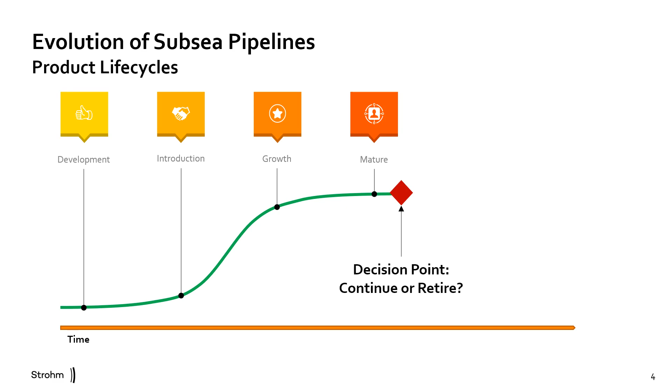And then there is a dilemma. Every product life cycle has an inevitable milestone where a decision has to be made to either continue with that product or retire it. If we continue, there are options. We can allow it to naturally decline, or we can innovate, seeking incremental improvements that will keep us moving onwards and upwards, prolonging or extending the lifetime of our product.

Our industry is full of great examples of innovative product iterations, but a disruptive innovation is one that provides a real step change in productivity, and these are rare.

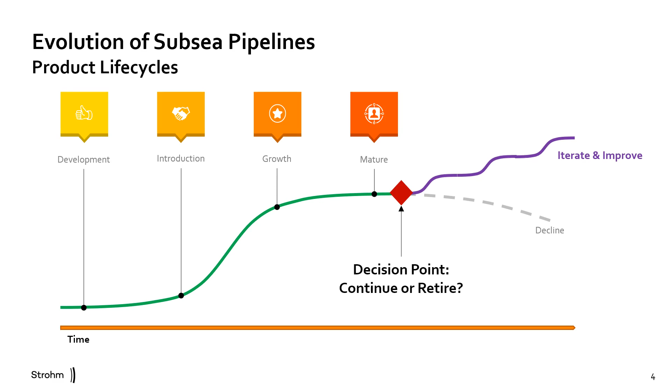To illustrate, let's take this idea of a disruptive innovation and apply it a little closer to home. So consider the subsea pipeline industry.

When we look at traditional subsea pipelines, there is a long and successful track record, beginning with rigid steel pipe. For many years, this was the product of choice for oil and gas transportation, and definitely the most prolific pipeline product used in our industry today.

Our first major example of disruptive innovation was the unbonded flexible pipe. Pioneered over 50 years ago by Technip, this product built on the robustness of the metals technology already used in steel pipelines, and introduced polymers as non-structural layers in order to provide a conduit for the transported fluids.

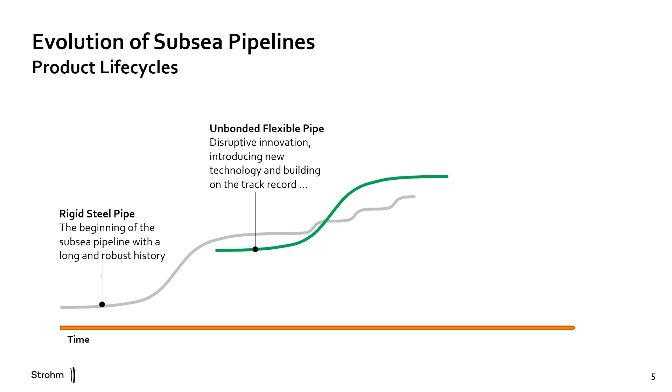This decoupling brought many advantages, making the pipelines flexible, led to easier and quicker installation. Creating a polymer conduit to contain the bore fluids allowed us to select materials that could better withstand the extreme fluids that the pipeline had to transport.

In its 50-year history, the unbonded flexible pipe has seen continuous innovation and improvement. There are many options in terms of material. For the metal components, you can choose from low-cost standard steels all the way up to highly specialized exotic alloys.

The polymers used in unbonded flexible pipe have also seen continuous development. Materials used for the fluid barrier have been refined to the point that we now have options based on polyethylene, nylon, and of course PVDF that have been specifically formulated for use in our industry, giving the best balance between robustness and chemical compatibility, ensuring a long and safe service life.

Much like the introduction of flexibles built on the development of the metals used in rigid pipelines, Thermoplastic Composite Pipe, or TCP, takes the experience we have with the robust and qualified high-performing oil-field polymers and opens up a new world of possibility.

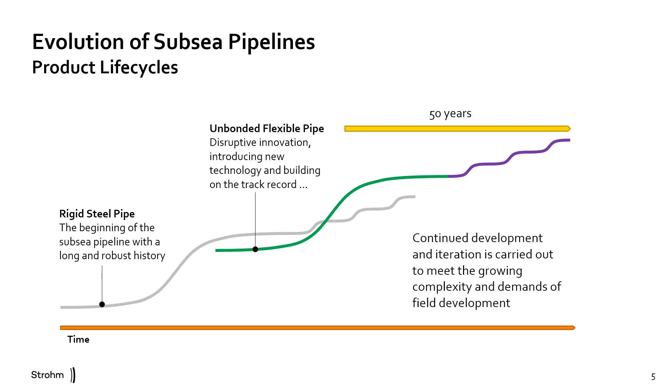The introduction of TCP represents a step change in the subsea pipeline industry, and Strohm bring an approach to its development which has its roots in the most innovative companies of today. The starting point for TCP was to create a platform that took full advantage of the highly refined thermoplastic polymer systems used in unbonded flexibles.

Combined with the expertise, design tools, materials technology, as well as the mindset used in the aircraft and space industries, this platform gives us endless possibilities to refine and optimize the capability of subsea pipelines, and allows us to move forwards on a trajectory that not only meets the needs of today, but has the capability to meet the needs of the future.

These are not just words. The evidence speaks for itself.

A little less than 10 years ago, and only a handful of years since the concept of using TCP for subsea pipelines was created, we successfully introduced our first commercial product line for subsea well intervention.

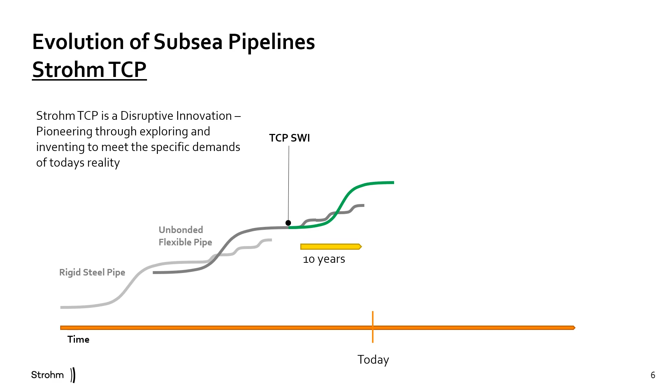As it is the nature of TCP platform to evolve, and in partnership with the early adopters amongst our client base, we quickly built on this success and moved into the development and introduction of jumpers and flow lines.

Whilst this was going on, we also led the way in the creation of a new DNV-authored industry standard that would govern the design, qualification, and use of TCP.

In the last 5 years, we have sold and installed many subsea jumpers and flow lines, all qualified to this robust industry standard. Today, we are in a period of exponential growth set to continue for the foreseeable future.

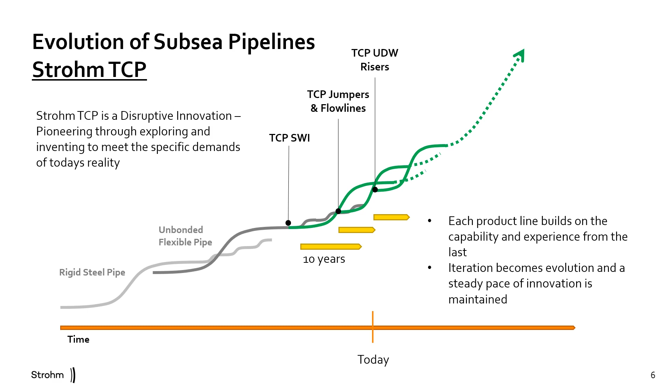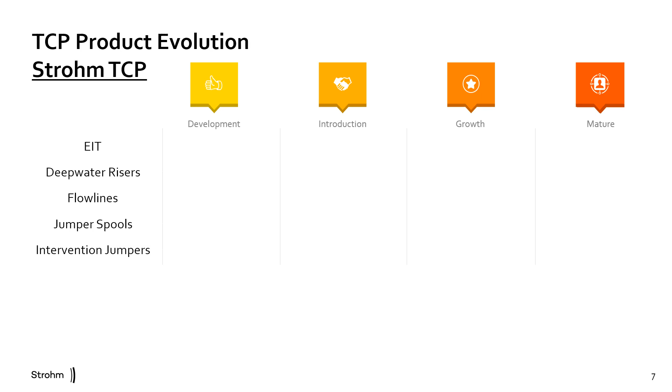Strohm is already an established supplier of TCP in the subsea pipeline industry. We are extremely proud of our track record and have several successful product lines covering subsea well intervention, jumpers, and flow lines. Looking to the future, we are already on the cusp of introducing the next generation of TCP.

After recent advances in the capability of our materials, design, and manufacturing technology, deepwater risers are the next major product line that is ready for introduction.

We are also expanding our business, meeting our clients' needs in the energy transition space with safe and efficient hydrogen transport, as well as pipelines for carbon capture.

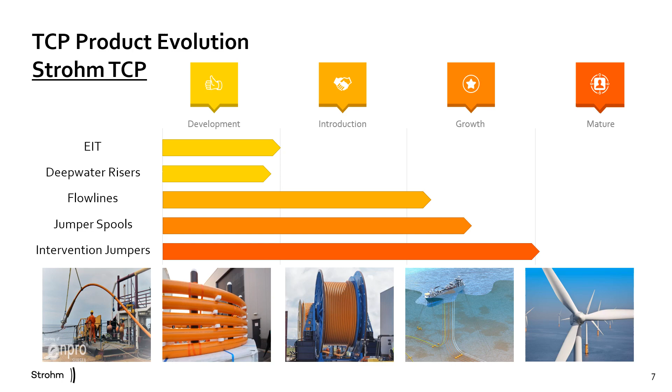So what is TCP? Well, it's really very simple. We have a multi-layer construction, not unlike traditional technology, except that it's a fully bonded structure based on a single thermoplastic material family that has been selected to provide the best performance for the target application.

To be more specific, we have taken the specialized thermoplastic polymers developed as a fluid barrier in unbonded flexible pipes and given them the job of also maintaining the structural integrity.

We do this by adding either glass or carbon fibers in such a way that we add strength to the material in precisely the location and direction where it's needed.

And all of this is carried out in a single production facility, employing our proprietary manufacturing technology that melt fuses all of the layers to form one continuous reinforced cross-section to an exceptionally high level of quality.

There are infinite possibilities to create tailor-made structures in this way, but in TCP we focus on a combination of several key aspects, namely the internal pressure requirement, the external pressure requirement, as well as the overall tensile properties required for installation and operation.

The result is a pipe body structure that is lightweight, flexible, and completely corrosion-free throughout its lifetime. We even have a built-in solution for adding weight, often to aid on-bottom stability, or in the case of a riser, stability in the water column.

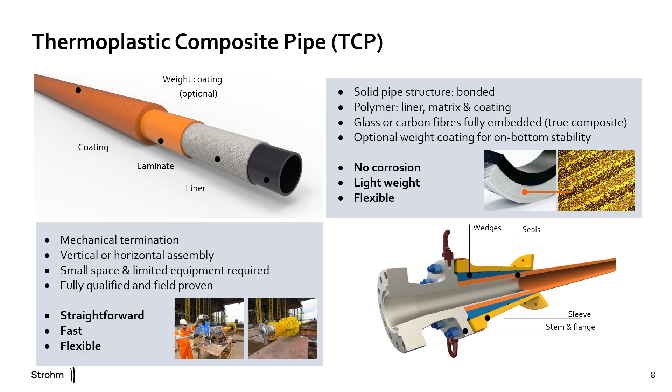The core of the product is based on proven and qualified oilfield thermoplastic polymers. To date, we have 3 options depending on your application. Our primary product line, and the source of our excellent track record, is our polyethylene pipe, which uses glass fibers for reinforcement. Fully qualified in accordance with DNV standard F119, it boasts a top-end operating temperature of up to 65°C, and a maximum pressure, based on what we have supplied to date, of around 5,000 psi. With all the benefits of polyethylene for mid-level applications, this is the workhorse of the TCP product line.

For more specialized or onerous applications, we have 2 material options utilizing carbon fibers for reinforcement. These are intended for high pressure and deep water, but also extend our operating temperature window up to 80°C for nylon and 120°C for PVDF. While the carbon fiber provides exceptional structural properties, these materials have been specifically developed to cope with extreme conditions such as high CO2 content and sour service.

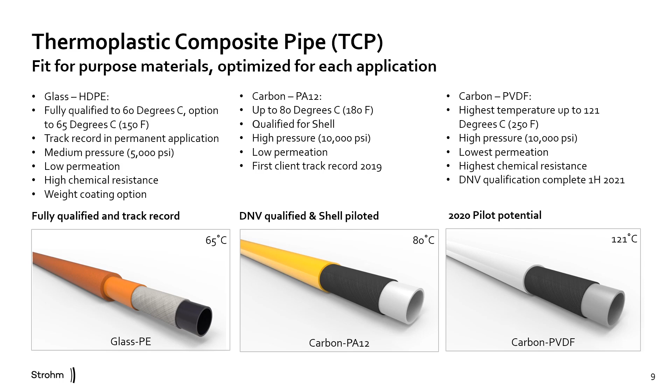All of our TCP products boast extremely low gas permeability due to the bonded cross-section and the additional shielding provided by the inclusion of fibers, which take up approximately 50% of the volume in the composite section.

Strohm don't just offer outstanding pipe. We bring you many benefits and provide value that makes TCP an outstanding solution. In the following slides, I will dive a little deeper into each aspect of the supply chain and give you real examples of where TCP can and will be your product of choice. Let's start with the engineering and manufacture.

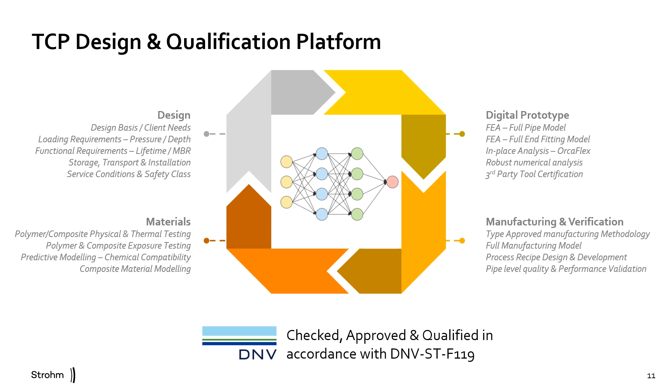The polymer is the base level constituent, and we have carried out tens of thousands of tests on polymer coupons. Some tests are used to purely characterize the material and ensure that it meets our expectations, but the majority are to validate what we already have predicted using our analytical tools and models. Consider properties such as chemical aging and resistance to rapid gas decompression. Understanding these things and having the ability to accurately predict their effects are key to the safety of our product, so we feel it is essential that we pay close attention at the very beginning in order to account for them in the design later on.

This approach continues upwards. When we combine the polymer and fiber into a composite tape, or when we add multiple tapes to make a laminate, we fully simulate and then rigorously validate the performance. We use engineering know-how and science to create accurate models that are then used as the inputs to our structural design tools. Because we build products that need to last many years in such extreme environments, we don't just look at the virgin material.

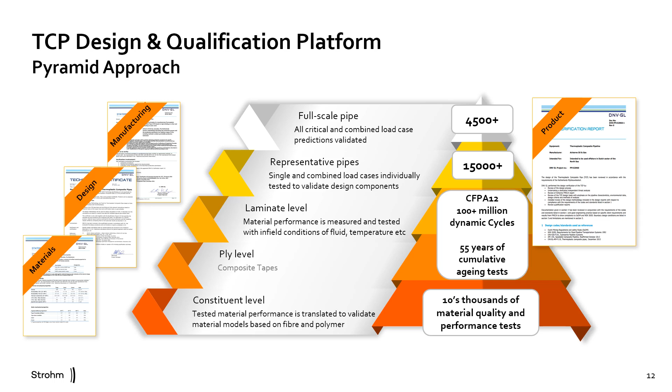The pyramid gives you an idea of the extent of our understanding and the rigorous approach we have to design a TCP. But what about your specific application?

The first step in evaluating any application is the service fluid assessment. This assessment gives us some very clear answers to which of our materials is suitable for your application. Based on the combined knowledge of our subject matter experts, and of course the huge amount of data we obtain during qualification, we can quickly identify a solution that is fit for purpose.

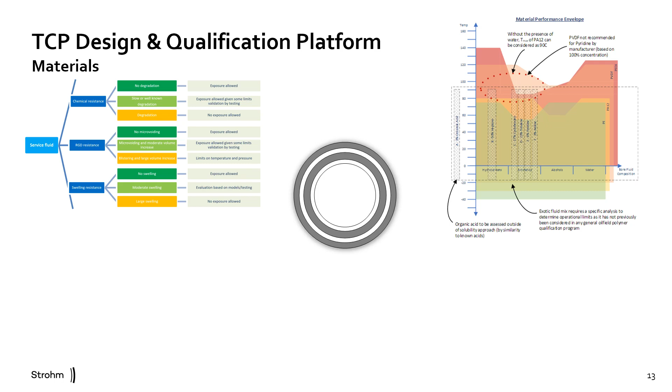We focus on your operational requirements and then further refine the assessment into areas such as chemical compatibility, resistance to rapid gas decompression and swelling. We then consider the long-term utilization of our materials, and safety is built in with the DNV standard F119.

We first fit the test data to curves and then calculate the regression. At this point we need to make sure that all points, including outliers, are taken into account and apply what is known as the lower confidence limit.

Also, from here we apply a safety factor based on the type of service, and only then produce a curve that we can use for design. This safety factor is significant and is intended to ensure beyond any doubt that when a TCP is in service, you can fully rely on its performance and integrity for the full service life.

The data population is also important. The benefit of generating high levels of data, not just during qualification, but data that is representative of the continuous material supply that we receive, is that we can add an additional element of safety by ensuring that at all times the performance we consider for our design is well within the limits set in our specifications. If any specific batch does not meet the requirement, then it is not used in your pipe.

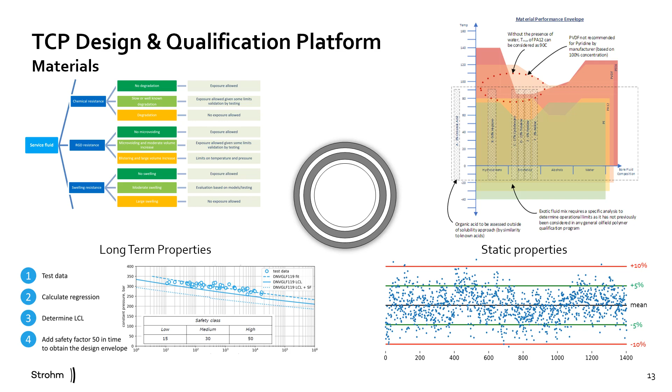It is a similar story when we look at the pipe design itself. Safety and robustness are key to our success. So in addition to the safety built into our materials, we continue the theme into the design.

Consider the chart shown. When we design a pipe, we also create a digital prototype. That prototype is then digitally tested, and the output is the predicted performance that we need to validate through physical testing. Of course, what happens in real life does not always match what happens on the screen, so we retest

digitally, taking into account the upper and lower tolerances from every step of our pipe manufacturing and end fitting process. This gives us two curves that represent the best case geometry as well as the worst case geometry. These are translated into an upper acceptance limit on performance and also a lower acceptance limit.

The real expected performance, given that manufacturing tolerances can never be fully eliminated, is generally in the middle of these two curves. A pipe with as-built performance anywhere between these two curves is considered acceptable for qualification. However, to maintain our mindset of safety and robustness, the safety factor and resulting design space is always calculated from the lower acceptance limit, ensuring the pipe always has a very high minimum safety factor, regardless of whether it's at the low end or high end of the acceptance limit.

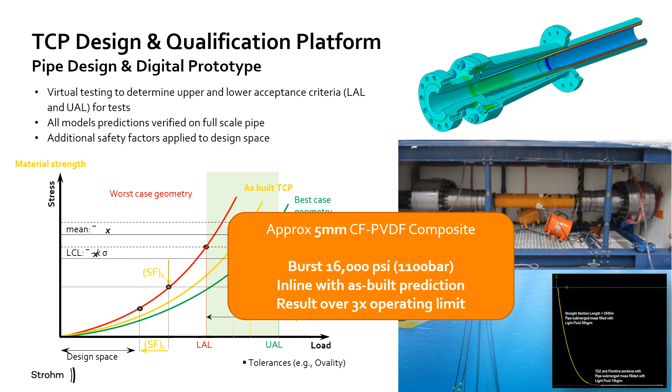Let's move on to manufacturing. Located in the port of Amsterdam, we have our state-of-the-art production facility. Alongside our in-house extrusion capabilities, we have 3 TCP production lines—2 for commercial work, and 1 development line. We have 2 sets of carousels, and then a whole range of storage reels. The entire facility is clean, compact, and above all efficient, with all of our engineering, test, and production teams co-located. It's also very easy to visit us, with just a short drive to Schiphol Airport.

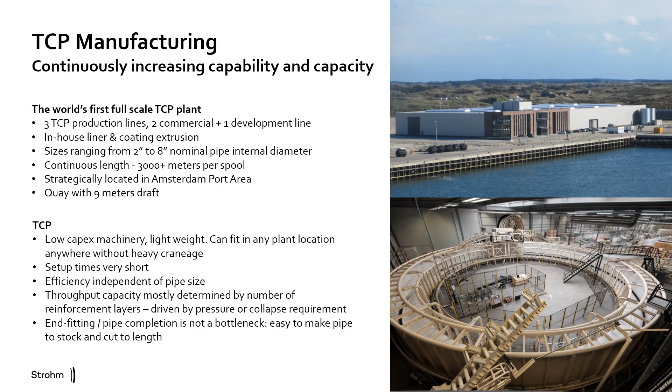In each of our production lines, we have a series of tape winders, and then what we call melt fusion stations, or MFS. The polymer liner is made on our extrusion line and sent to a carousel for storage. When needed, it's fed through to our tape winders, where the composite tape is wound at a specific angle to give the desired properties. At this point, we're not too concerned about micron-perfect tape placement, as the system is fully capable of dealing with gaps and overlaps within the individual tape layers. The key is the angle.

From here, the tape is fed into our MFS, where our proprietary system applies just the right amount of temperature and pressure to create a fully consolidated layer. This process is repeated over and over until we reach the desired laminate thickness to give the pipe the performance it needs. We also have the freedom to change the angle within any individual layer to tailor the pipe cross-section properties for specific applications such as riser systems. Regardless of this change, the process remains exactly the same, and we arrive at a fully bonded cross-section tailored to your need.

But what about the quality? Consider zero porosity, defects, and voids as 100% on a quality scale. In general, a composite structure is as near to perfect as it gets when it's at 97% or above, and actually this is the number used for the structures of the aircraft that we all like to fly in.

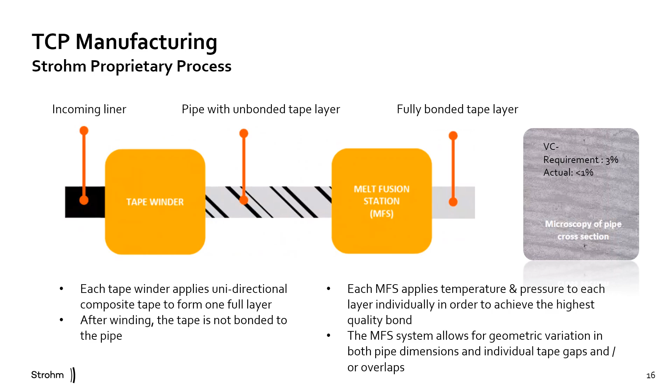In addition to this, we also have 100% visual inspection during manufacture, and at the end of every pipe, dozens of samples are taken and inspected under a microscope. For the unlikely event where something does make it through, we also have a certified repair procedure that we can carry out online. We simply pause production, address the affected area, and then carry on.

As mentioned earlier, the key advantage of a composite structure is that by placing the fibers in the right direction at the right location, we have an incredibly fine level of control and can tailor its performance to any application. What this means is that for any tape layer throughout the composite laminate section, we dictate the specific angle at which we lay the tape.

In its simplest form, we split this into two main categories, which we call our flowline layup and our riser layup. Generally, the flowline layup is for static or quasi-static applications that do not require enhanced tensile performance. In these designs, the tape angle gives us a balance between internal pressure resistance, external pressure resistance, and the tensile capacity of the pipe. As this name suggests, this is an ideal layup for flow lines and is also used for jumpers.

For risers, or any pipe that requires high tensile capacity, we do things a little differently. Within the composite structure, we vary the tape lay angle significantly. This allows us to maintain the balance between internal and external pressure capacity, while adding more fibers in the axial direction to achieve tensile capacity. As with any balance, if you offset one aspect, there's a trade-off. In the case of adding more fibers in the axial direction, we increase the pipe stiffness, and this can lead to a larger minimum bending radius.

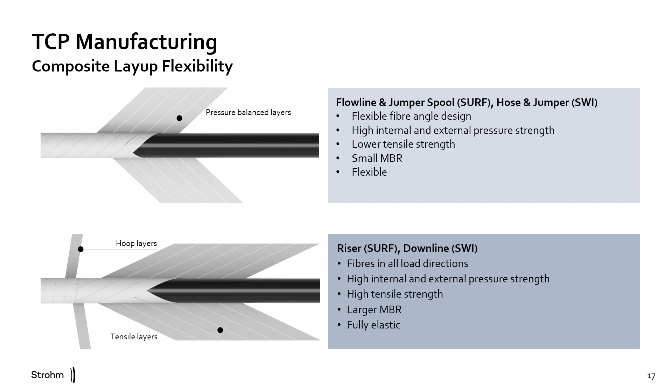Here is an example of a carbon fiber PVDF pipe at various points in our manufacturing process. We currently have several material options for the various layers, and from a supply chain continuity perspective, this is important. But we also have materials tailored to the two main categories mentioned.

In terms of qualification status, we have finished the majority of testing and validation for the polymer and tape materials in the flow line and jumper category. These qualification projects will be fully complete by the middle of this year. In terms of pipe level qualification and validation, we are currently in the middle of a project that will qualify the first carbon fiber PVDF TCP for high temperature and high pressure deep water jumper and flow line operations.

For the riser system, we have several more options in terms of material. On the previous slide, I mentioned that using the riser layup leads to increased stiffness of the pipe and may lead to an increased MBR. This is not a problem because again it's all about balance.

To counteract the trade-off between tensile strength and stiffness, and in partnership with our key material supplier, we have developed a higher performance tape option which gives us increased strength exactly where it's needed to reduce the MBR. The qualification for this material is already underway, and we have plans for the full riser system qualification in the very near future.

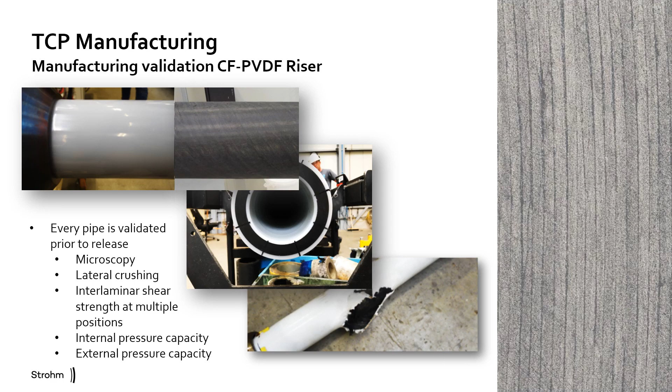The question is often still asked, what about the parts of the pipe that we can't see? It would not be a good idea for us to start cutting into the pipe in the middle, so we have developed a non-destructive examination capability to give peace of mind where it is requested.

The example shown is using a digital X-ray method of inspection. This method has already been used extensively on our polyethylene products, but the image shown is a scan of our PVDF riser. As you can see, the images of the pipe cross-section are of a very high standard. Incidentally, the quality of our manufacturing is also of a very high standard, so there is not much to see.

To show that it does actually work, I did manage to find an image where we captured a piece of the blue tape on the outside of the pipe.

For continuous inspection during manufacturing, we have also carried out trials on moving pipe, and the equipment performed admirably, maintaining a very high resolution even at the fastest of production speeds. We were so impressed with the capability of this equipment that we are now exploring plans to use it for offshore inspection. We are extremely proud of the fantastic work carried out by all of our partners, and of course our own teams, to have produced such a comprehensive and capable platform.

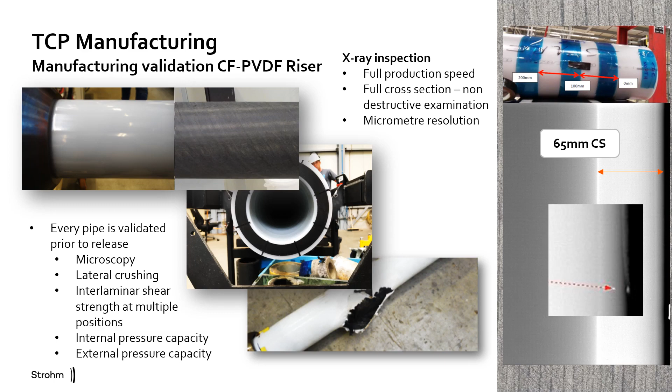There are many inputs and outputs to consider when we look at our TCP platform. And like any complex engineering, it takes years to learn and then to fully understand. This is where DNV come in.

With DNV, we have a body of expertise on TCP, and they also act as a certification authority to give you the confidence and assurance that the pipe you are putting in the water is fit for purpose, robust, and above all safe. When the pipe leaves the factory, it also has an extremely comprehensive set of engineering and operational documents, as well as certificates from DNV.

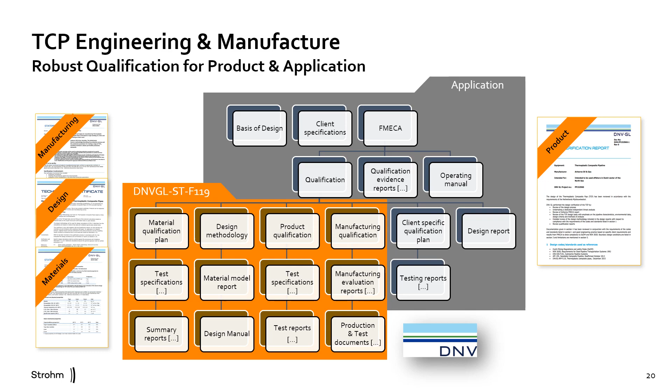Now we will cover the transport and installation aspects of TCP. TCP is designed to be lightweight. This optimization means you don't need extremely expensive lifting systems to move it around.

Compare this to an equivalent unbonded flexible, and it represents a significant reduction in both pipe weight as well as the weight of steel needed to construct the reel that has to support it. This optimization affects everything from the cost of loading all the way to the sea fastening systems that need to be designed and constructed for transportation.

To top it all off, we also have a 9-meter draft at our quay, meaning that there are not many transport vessels that can't get to us for a quick and easy pickup.

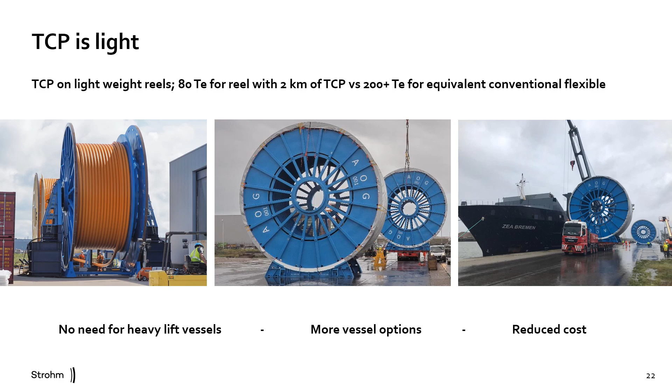Most of the equipment for transport and storage is also used for installation, and there are many installation methods to consider. Due to the lightweight nature of the product, preparing the pipe onshore and then towing it to the desired location is not a problem.

When you need to take it further out, the usual spread of carousels, which can also be loaded off facility directly from our own storage carousels, are able to be used.

We often deliver on a subsea pallet. These can be taken to the installation location and wet parked, meaning that at your convenience, you can place it in the field for storage and then simply come along at a later date, uncoil it, pull it into position and then connect. And finally, we have reels. These are available in many different sizes, depending on the product.

During design, we balance the performance requirements of the pipe with the required MBR for storage and installation. This means we are able to tailor the design of individual sections and even the full pipe to the available vessels or methods for installation.

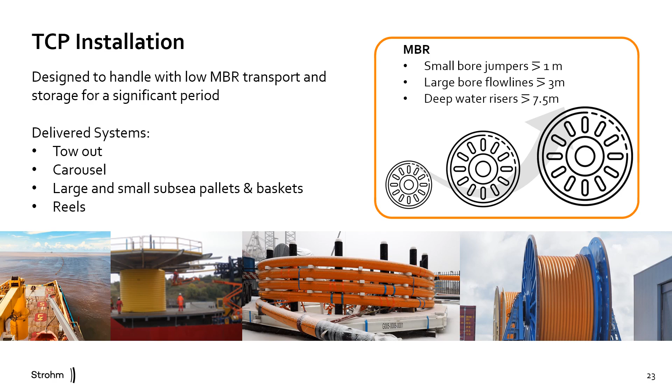This flexibility allows us to create an optimized product that will deliver value in many areas. It's not just a world-class pipe, it is a world-class solution.

There is in offshore construction a very wide breadth of vessel types for pipe installation, ranging from very large and capable deep-water pipe-lay and construction vessels to small, multi-purpose vessels that have a much lower specification. Vessel selection is a key factor, not only in cost and schedule, but planning and installation methodologies.

The higher the specification, the higher the day rate and mobilization costs, and the range between the highest specification to the lowest can be as much as $300,000 a day at the top to $40,000 a day for the more modest option.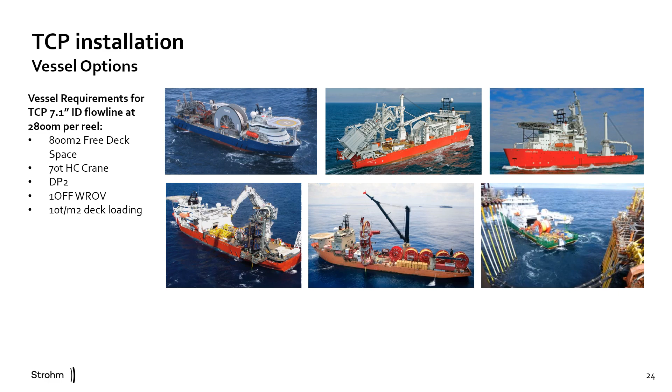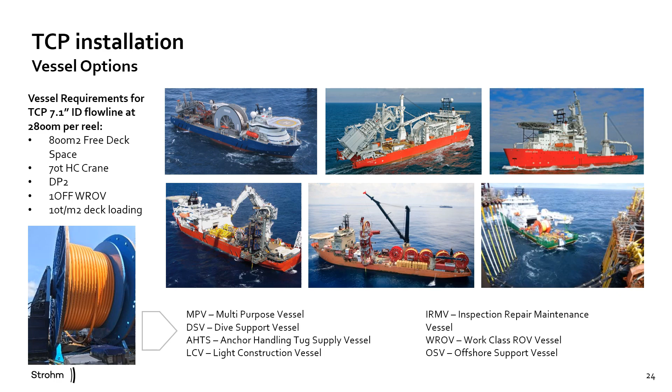Let's take another example from our 7.1-inch flow line. The vessel requirement for this pipe is also fairly modest. In fact, when you consider this requirement, the options available for installation are numerous, and often where a replacement pipe is needed, there is likely to be a suitable solution already in the field.

That was the case for this project. The specification of the MPV already on station was more than acceptable for the safe and efficient installation of the pipe. Due to the lightweight nature of the TCP, the product lends itself to be installed using a horizontal lay system. This reduces the overall complexity and was a good fit for the installation vessel, which was already on a long-term charter by the operator.

All we had to do was add the lay equipment, some wire rope for the OBS solution, and a banding station to bring it all together. A few days after setting off, the first 2 kilometers of pipe was already installed.

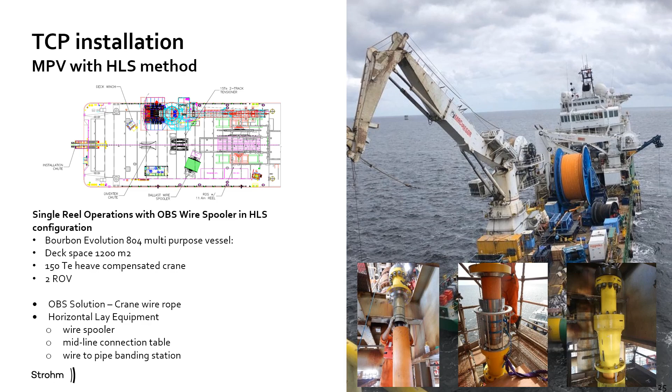During this project, we also had the opportunity to demonstrate the flexibility of our end terminations. With the pipe already pulled into the platform, it was secured vertically, and then our offshore support crew added the final touch by fully fitting and testing the end termination in situ.

And finally, we come to the deepwater riser. The benefits of TCP are numerous for this application. The lightweight nature of the pipe eliminates the need for buoyancy.

The high strength means that you can dramatically reduce the length and use free hanging catenary configurations. The combination of these two aspects lead to very fast installation times and significantly optimizes your vessel timings and cost.

We have already seen that TCP can be installed by a wide range of vessels. For deep water risers, this is also true. Our high-performance carbon fiber PVDF tape for deep water risers allows a bending radius of just 7.5 meters to be achieved. This means that most flex-lay vessels can be used to install either horizontally or vertically with only minor modifications to their configuration.

Reel-lay vessels, such as the Seven Navica pictured here, are also perfect for TCP. Designed to install both rigid and flexible pipelines, the large reel storage capacity allows us to take full advantage of our design platform, striking the best balance between minimum bending radius and tensile capacity. And the stern-mounted and tilted lay system also ensures that this MBR is easily maintained throughout.

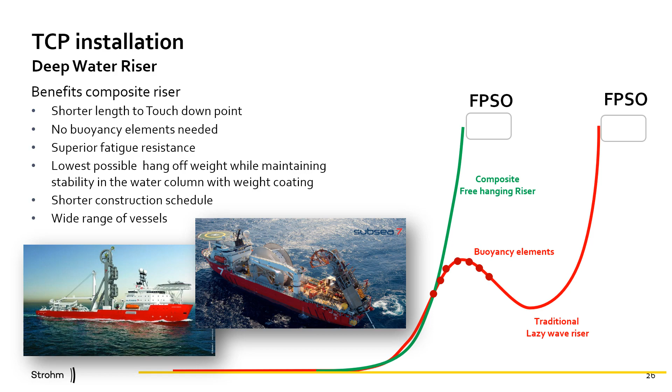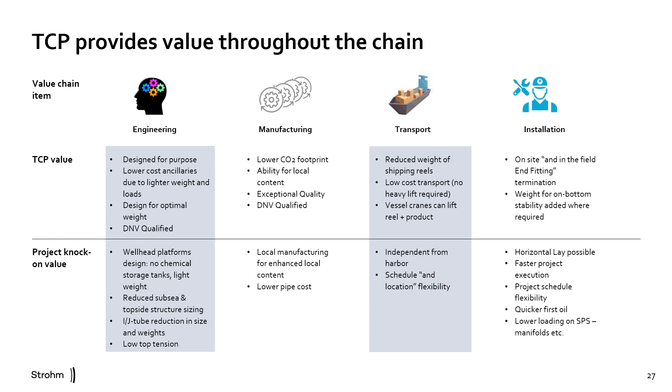And that brings me to the end of this presentation. TCP is a step change for our industry and provides significant value throughout the chain. Using our detailed and robust platform, Strohm will continue to improve and advance this world-class subsea pipeline solution. Thank you for your time.